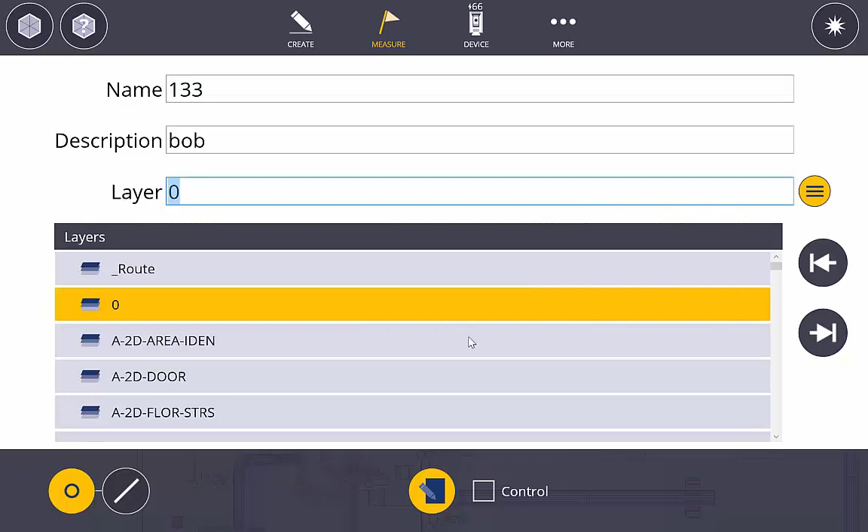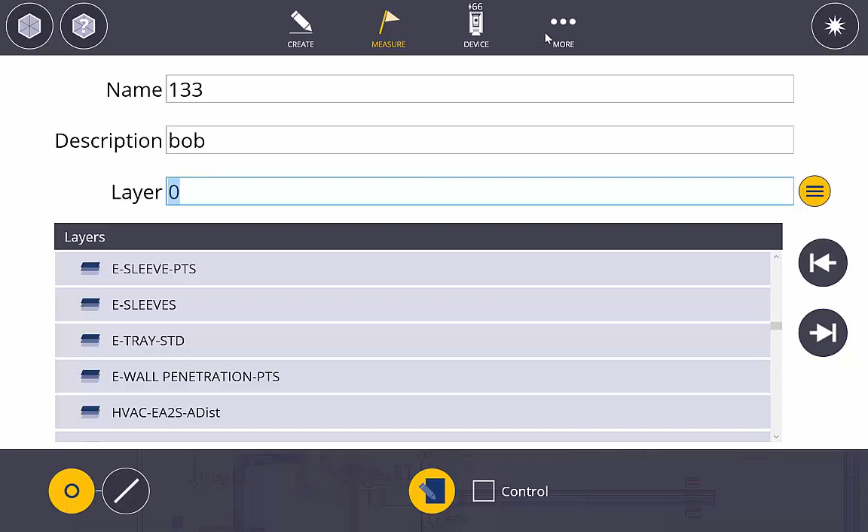And if I go to the ellipse and my layer isn't in the list, I need to create that layer first before I can do this. So I'm actually going to take a step back and show you guys how to do that. So rather than go straight into here, I'm going to go to more and I'm going to go to the map, because what I'm after is my layer button right here. And here's my layer button. And in here now I can create a new layer.

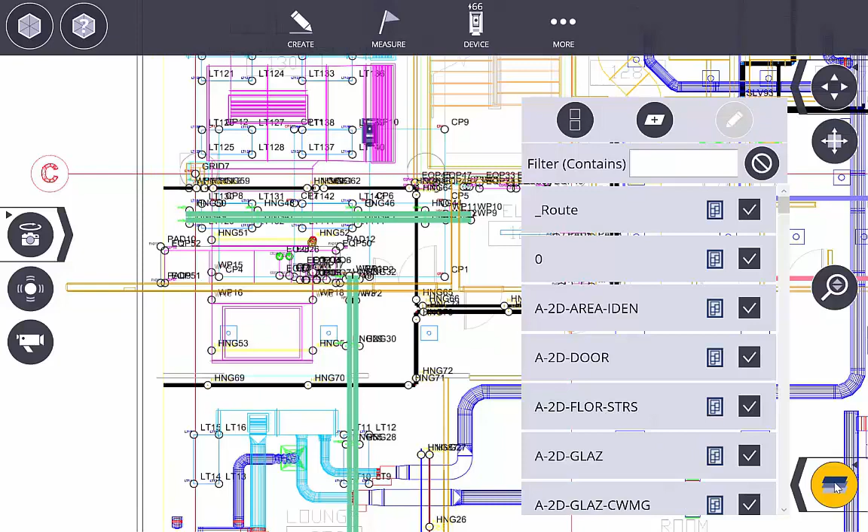So I'm going to create a new layer, and this is going to be called field control. And that means it's not control that the surveyor gave me, it's not control that the GC gave me, it's control that I made myself. You can really give it any kind of name that you want. Okay, so now that I've created that layer, I can close this and I can get back into my measure and collect and then my input form.

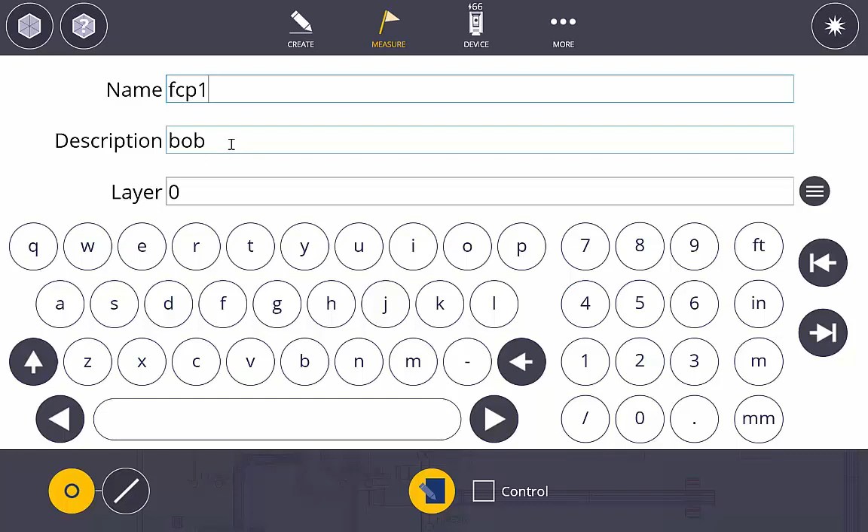So this first point that I'm going to be collecting, I'm going to give it an abbreviation and I'm going to call it FCP1. Field control point 1. You can give it any kind of a name that you want. Description, we're not going to call it Bob. We're going to call it north side of building.

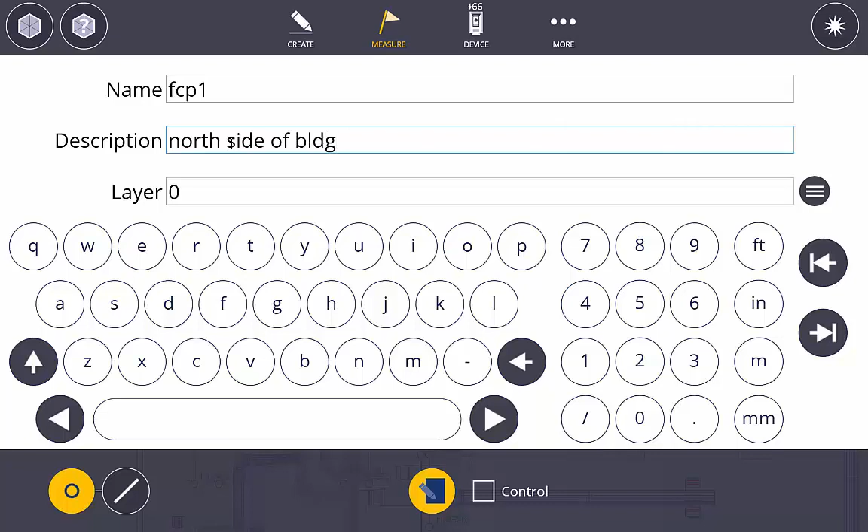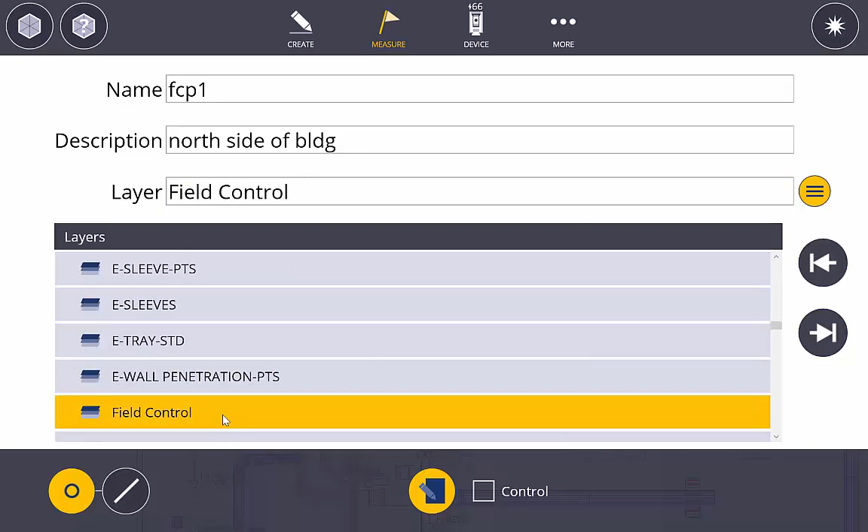And then layer. So here we go. Now I don't want layer 0. I want to go find that layer that I just created. Field control. And I believe actually there it is right here. So there's the layer that I created. Okay. So now any point that I create is going to start with FCP1. And now we can go and measure those points.

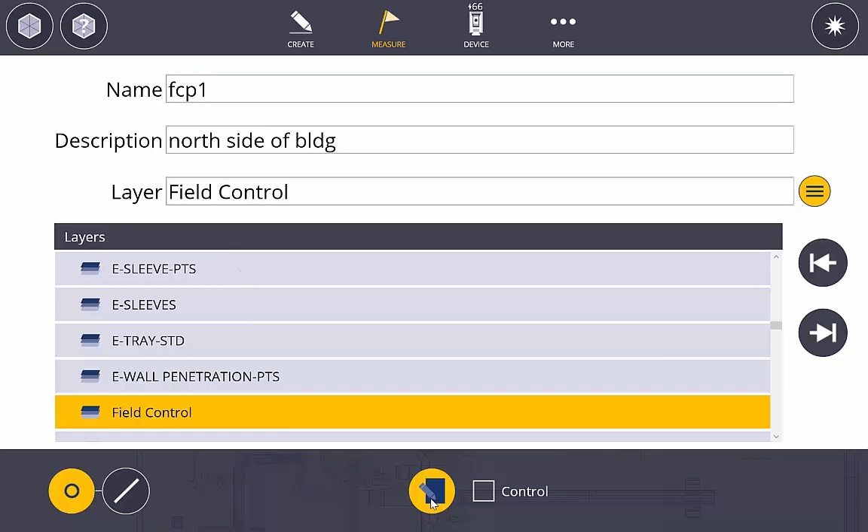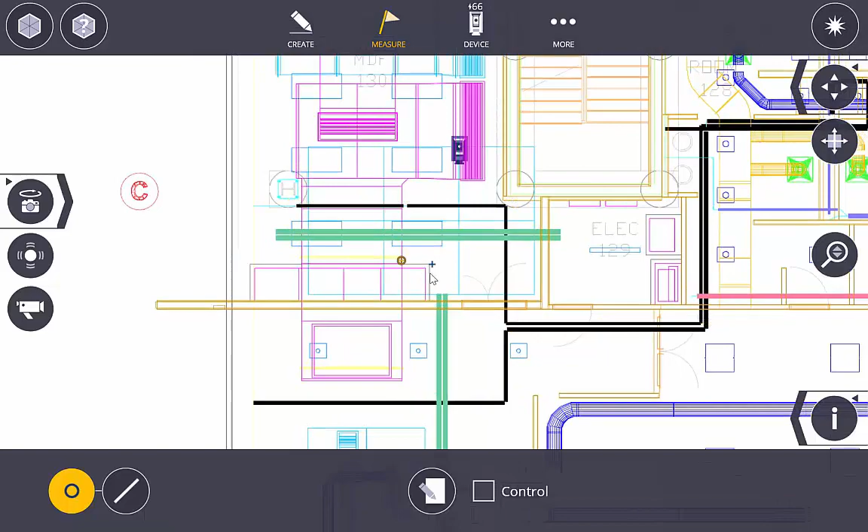So I'm going to get back out of the input form button so I can see my map. And I'm in prism mode, and so I'm going to walk around with the prism, and I'm going to collect a couple additional control points. So I'm going to zoom in to the area that I'm focusing on, and right here is where I'm currently stationed. And what I'm going to do is I'm just going to move around to a couple predetermined spots on my job site and hit the measure button. So I'll go do that now.

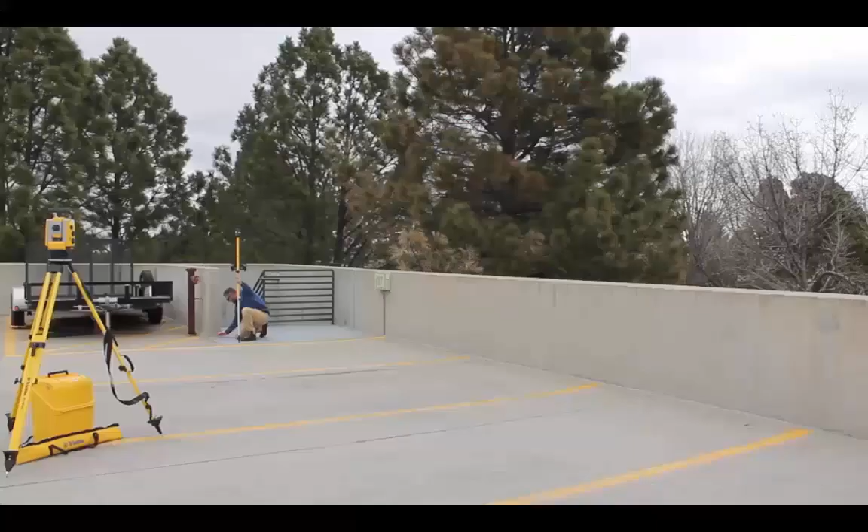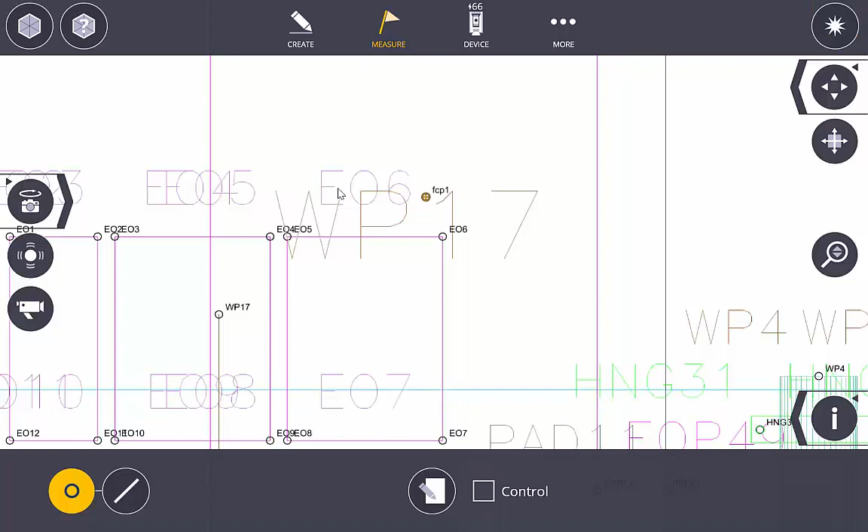Okay, so I've moved my prism pole kind of next to this equipment piece here, and I've got my prism pole set on the point that I want to record. And I also made sure that my prism pole is plumb. And now I can hit the measure button. It lets me know it stored that measurement, and it lets me know that this is FCP1.

Okay, now if I were to click on that point and identify it, there it is. It's FCP1. It's on the north side of the building, and the layer that it's on is field control. And here are its XYZ coordinates. Okay, so it's that simple. I'm going to go and record a couple more just because I can.

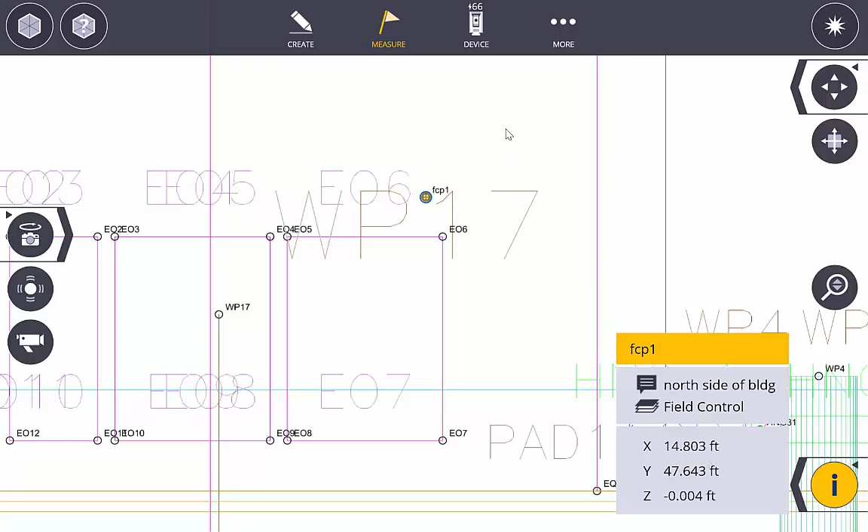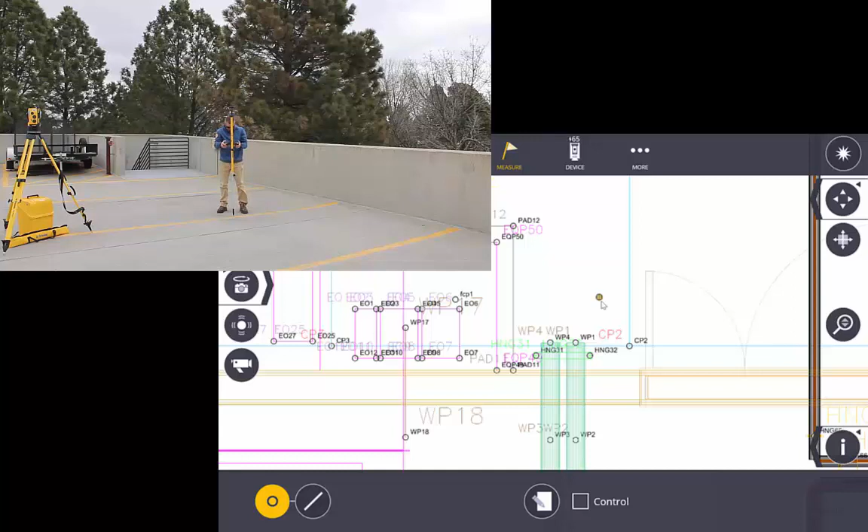Okay, so there's where I want to put my second point. Again, you saw the cursor kind of move around to where I am. That's me with the prism pole. I've set my prism pole on top of the point that I want to measure. I made sure that it's plumb, and now I can hit measure. Okay, observation stored. It stored my measurement. And again, it automatically labels these points for me. FCP1, FCP2, FCP3, so on and so forth.

And the nice thing about that is I don't have to worry about my numbering. Let's say I forgot though. Let's say I came back the next day and measured it again. All I would have to do is enter in FCP1 as my point, and when I hit measure, it would jump to the next available number in that sequence. So I don't have to write a bunch of stuff down or try and remember. Okay, so that's measuring with the prism pole. All right.

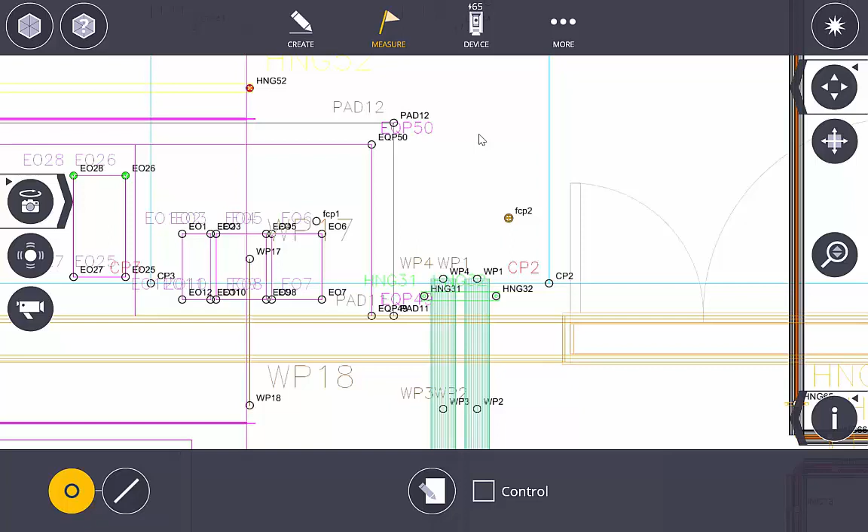The next thing I can do is I can measure with the laser. And this one's pretty slick because I really don't have to move. I can set up shop kind of right around where the instrument is, and I can come up to this button here and switch it from prism mode to laser mode. And we call it DR, direct reflex, is the official patented term for it. I call it laser mode. You got prism mode and you got laser mode.

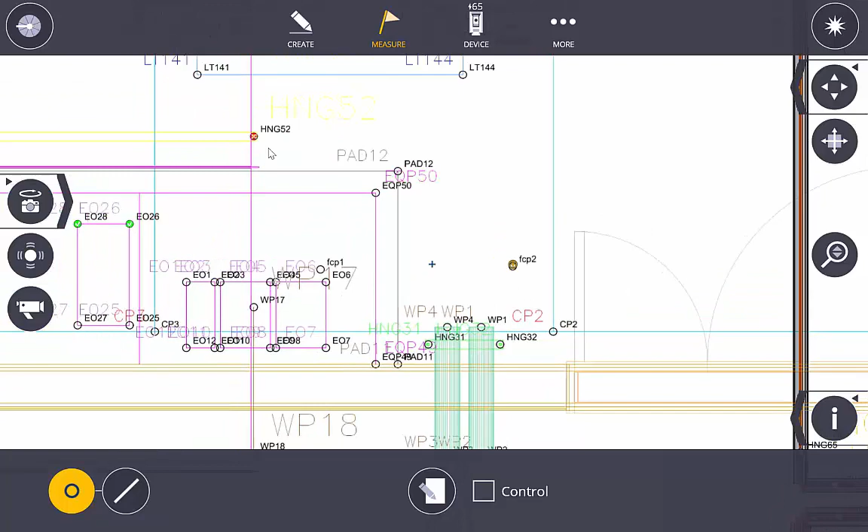And so what I can do now is I can point the laser at a wall or object on the wall, or maybe I've taken the time and created some targets. We've got some that you can buy. I used white duct tape and a Sharpie marker to create a little bullseye. And what I can do is I can point that laser at the wall, probably not right in the middle of a doorway, so maybe I'll go over just a little bit more. All right, so now I'm creating that point on that wall, and again, I can simply just hit measure. Okay.

Now in this particular example, what's happening is it's letting me know that that point that I just measured is actually beyond my farthest control point. And that's not a good thing. And here's why. If you think about angular accuracy, the farther away you get from the center of that robotic total station, you can add inaccuracy to your point. And this is a message that lets us know that, hey, you shot it beyond your farthest control point, so therefore this point may not be as accurate. It doesn't tell you exactly numbers, but it just says, hey, this is a warning. Maybe you don't want to do that.

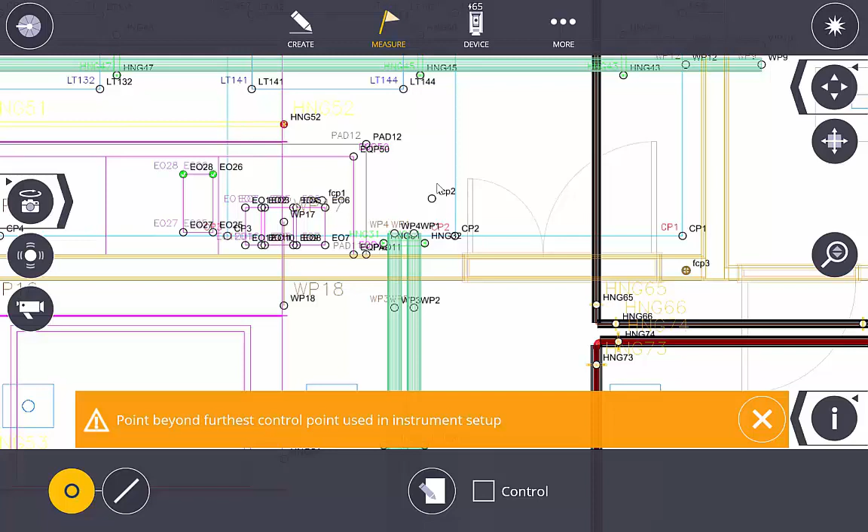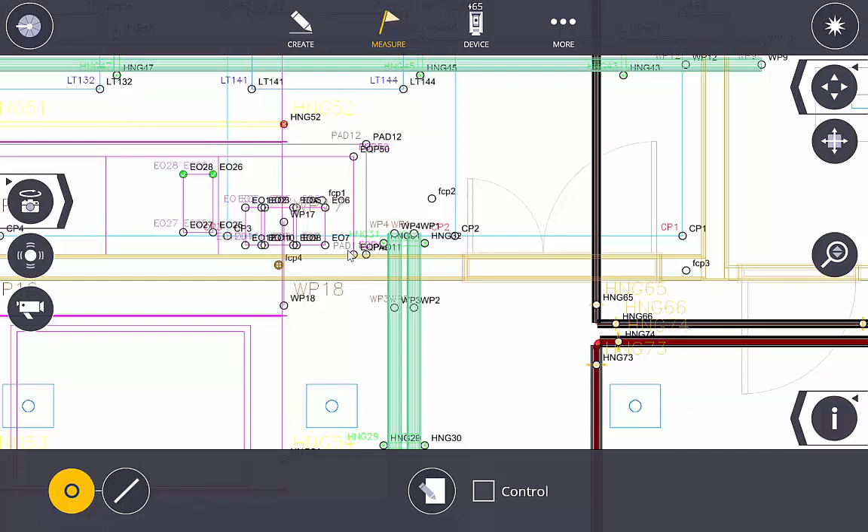Okay. So I'm going to close this out. I can come back and delete this later. I'm going to pick a better point. So I'm going to turn my laser to a different location on that wall and find a different spot and then put a different piece of tape up with a bullseye on it. And then I'll go ahead and hit measure. Okay. So it jumped from FCP3 to FCP4. Here's that point right there. And so now I've added some additional control points.

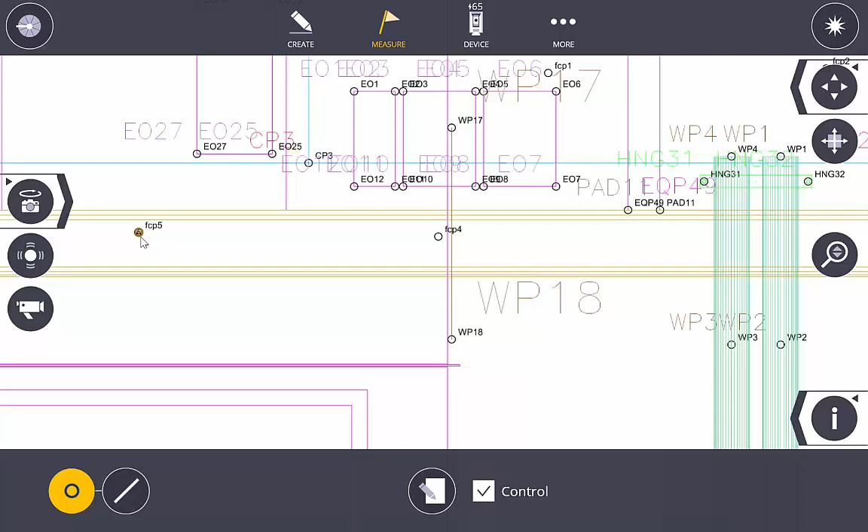All right. Now one of the things that I forgot to do though is I forgot to put a checkbox that shows that I want these to be an exact control point. Now what happens here is if I move my laser again, and I'll move it just down the wall a little bit, and I'll measure this point, what you're going to see is that symbol, again, it's telling me observation stored. Let me move my laser so you can see that a little bit better. It shows a different type of a symbol. This symbol with the circle with the triangle in it represents a control point.

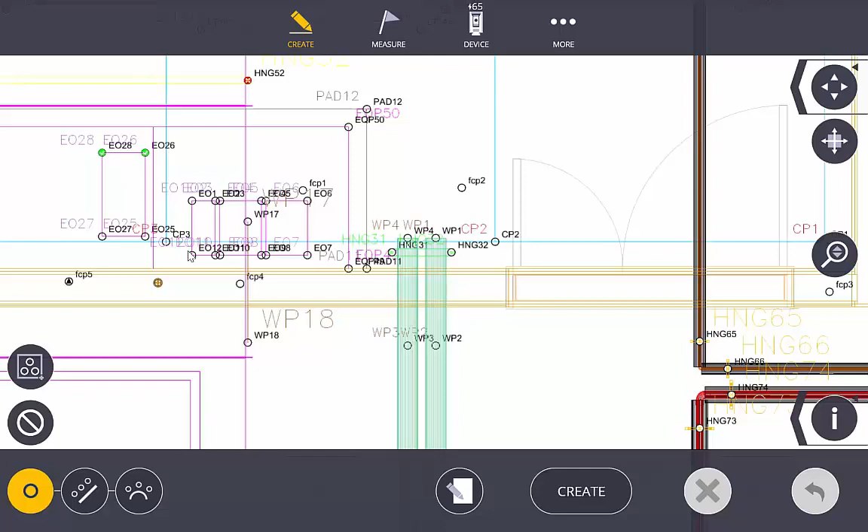Now, I forgot to do that on my first 4. So luckily, I'm not dead in the water. One of the things that I can do is I can fix it. So to fix that, I'm going to go to Create, and I'm going to go to Points, and I'm going to select those points that I accidentally forgot to change to a control point. So there's FCP4, FCP3, FCP2, and FCP1.

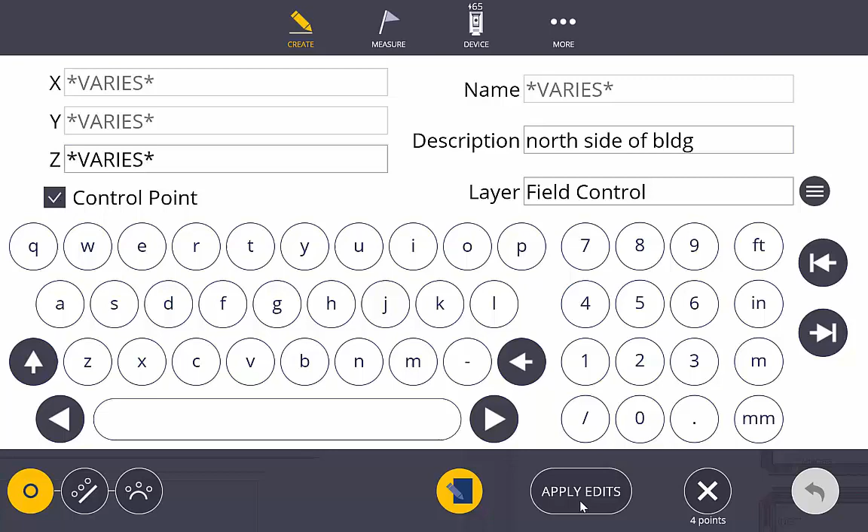So now I'll go to the Input Form button, because remember I want to interface with this, so I want to go to the Input Form. Okay, and here I can actually edit that point, and I can simply say these were supposed to be control points, and I can apply that edit. So now it says, okay, good job, green toast, you've done that. So now all those points are represented with a triangle.

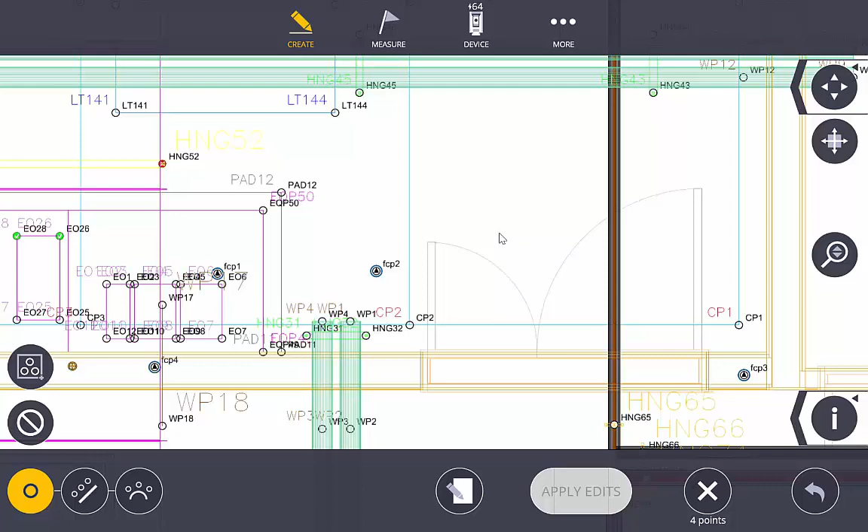Okay, so a couple different ways that you can collect points, either with the prism or with the laser. I use the example of collecting control points, but again, this really could be anything on the job site that you wish to measure its location.